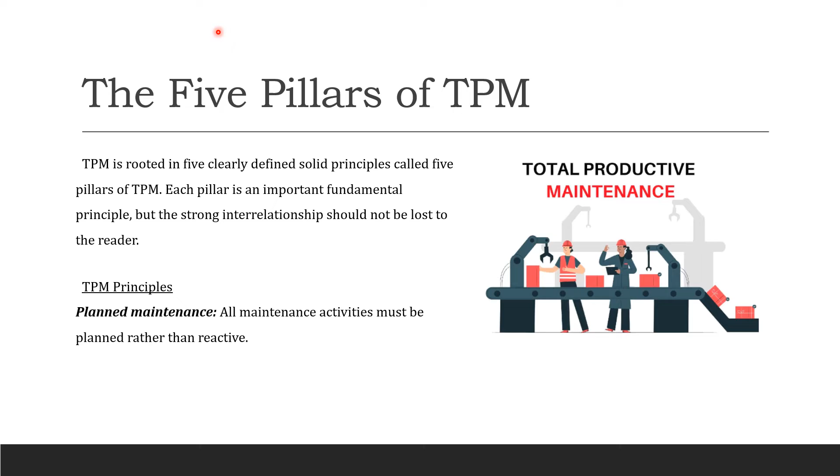The next one is maintenance-free. Maintenance-free is nothing but a system of thinking and practice at the concept and design stage. It's going to help create equipment that requires less maintenance, and when maintenance is required, the equipment can be brought back into operation in less time. So the maintenance-free principle is about creating equipment that requires less maintenance. We're dealing right here at the design stage. If we design the equipment correctly, then the equipment is not going to need a lot of maintenance. It's just like improving the design stage so that we can go maintenance-free.

Alright, the next principle is individual Kaizen. Kaizen is a Japanese word and is considered the single most important concept in Japanese management philosophy, but now is used everywhere in the world in total productive maintenance. It's just a constant search for improvement.

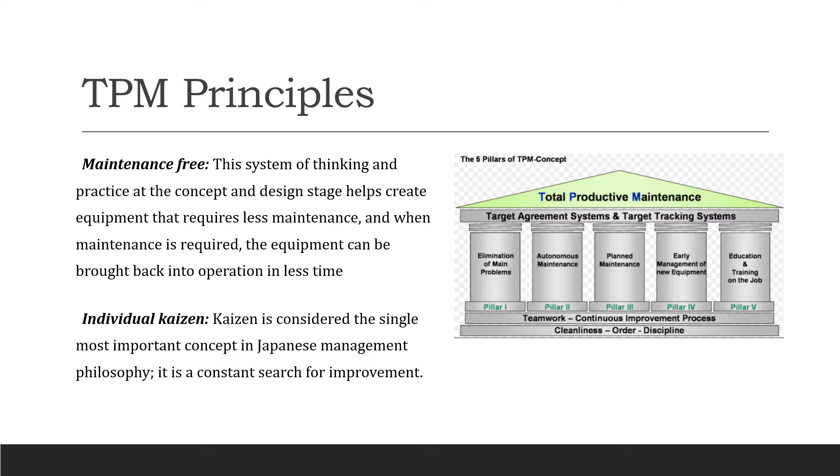This is just a conceptual picture or diagram that we usually draw for total productive maintenance. So we have these 5 principles, and I've already taught you 3 of them, and we're going to get into the next 2, and all of them are based on your quality, 5S, and safety.

So the next one is education and training. The effectiveness of employees directly depends on their knowledge of the principles of TPM. Therefore, you have to come to the university in order to be able to get all the foundational knowledge that you need to build your career on. And if your knowledge is at a lower level, it's going to be really hard for you to do the job. So it's so important that you gain this knowledge when you are studying.

When you're studying, do not judge the subject. You have to know everything as much as you can, not only what the professors are giving to you — you have to know more than they give you. So I totally recommend you have a textbook if you decide to pursue a particular career.

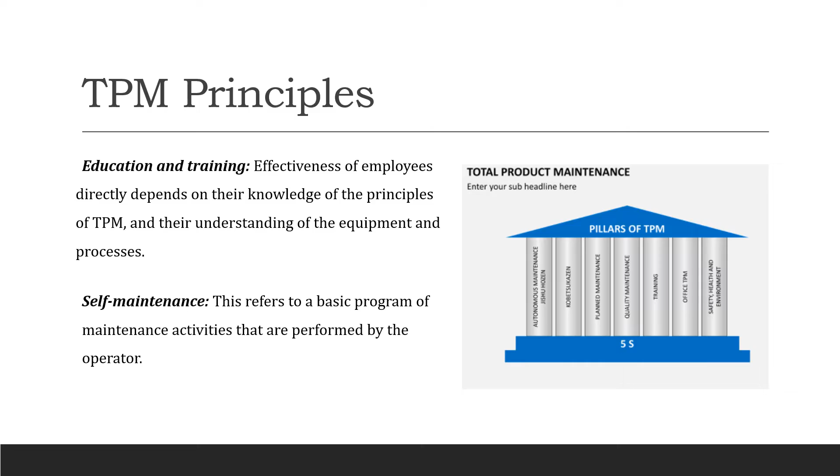The 5S is the foundation that these pillars are based upon. The pillar rests on the concepts of quality, 5S, and safety. 5S is just a concept used to describe proper housekeeping and organization, because it's so important, especially in manufacturing and maintenance systems and equipment. You definitely need housekeeping and organization because they really make a difference. Operation efficiency, process efficiency, and productivity are all usually based on this housekeeping or organization.

5S is described on Japanese philosophy of workplace organization, which is widely used in the whole world. We refer to it as seiri - that's the American way, or the way we say it in Japan.

I'm from Japan. I come from a little town called Saitama because my father is Japanese, and that's about a 45-minute ride by yellow line subway from Tokyo all the way to the north. It's just a little town called Hatoyama. We have a new town and an old town, up on a little mountain. There's only one supermarket up there - it's a pretty quiet town, and I love quiet places.

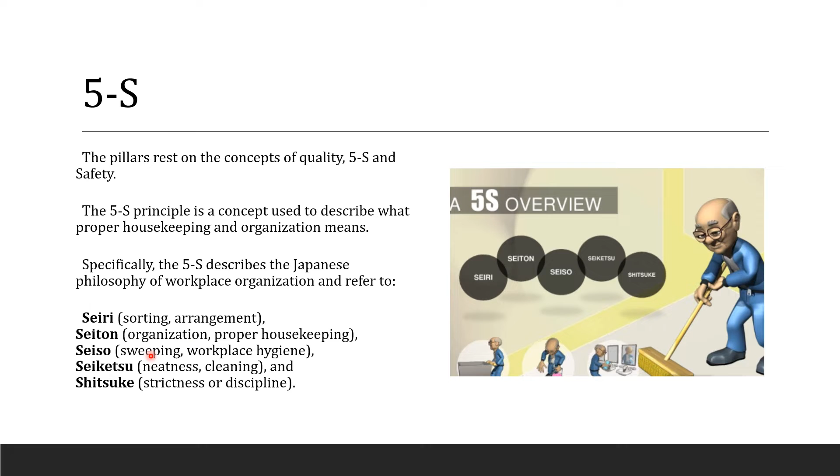So therefore, all of these principles, the 5S's - all the companies manufacturing so many things and distributing all over the world are based on this 5S principle, and it really works. So now it's adopted by the entire world. You can study that further - now you know what 5S is.

The 8 pillars of maintenance - we're not going to go into details, I just want you to learn all 8 of them. Again, it looks like pillars, and there are 8 of them, with the foundation being your 5S.

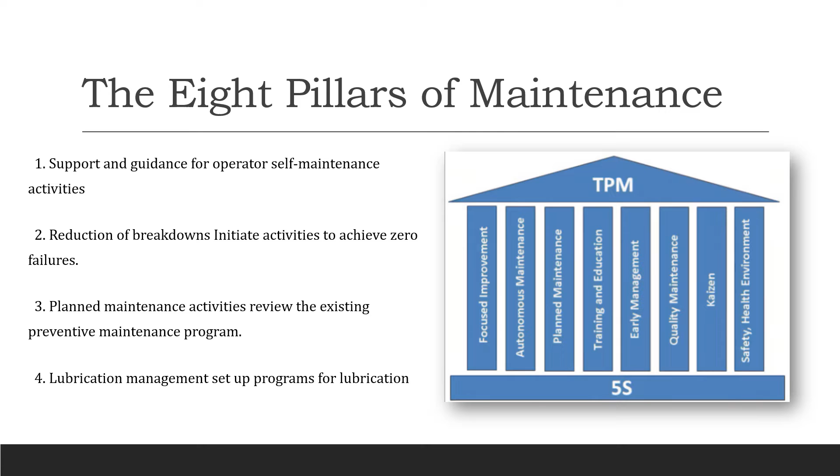The first pillar is support and guidance for operator self-maintenance activity. Second is reduction of breakdowns and initiating activities to achieve zero failures - very similar to lean manufacturing. Third is planned maintenance activities, reviewing the existing preventive maintenance program. Fourth is lubrication management, setting up programs for lubrication. And the fifth is spare part management.

Manage the spare parts inventory for planned maintenance, not breakdown maintenance. Sixth is maintenance cost management - establish a maintenance cost management system to track and control the overall budget. Next is maintenance efficiency improvement - analyze the current maintenance system.

And the last pillar is training - enhanced training of all operators. We're very heavy on training. A lot of Japanese concepts are heavy on education and training, and if you ever get hired in Japan, you will never get fired. They do not believe in firing anybody - they believe in training a person. So one employee will work at the same company for many, many years in Japan.

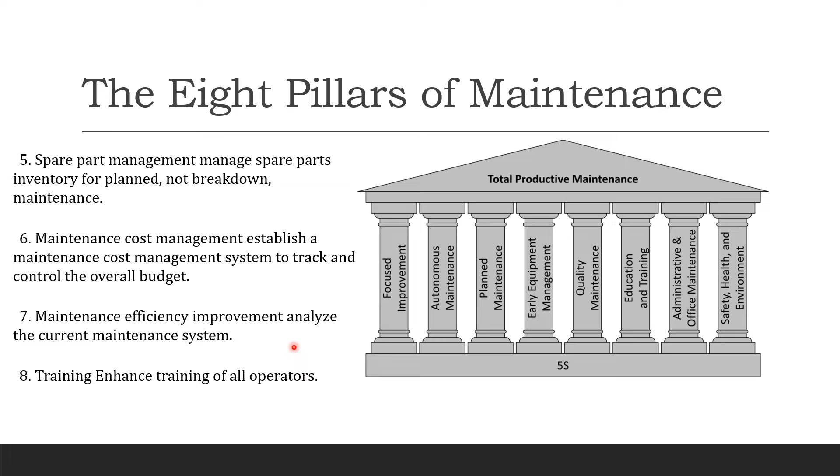So anyway, it's very stressful to work in Japan, but then you earn a lot of money. So if you guys have interest in work outside, you should also look into international industries which are linked to the United States. It's a very good opportunity, especially for men.

Okay, failure mode and effect analysis. One such procedure involves understanding potential failure - you have to understand the potential failures and the consequences of these potential failures on your system, equipment, and the overall operation system. Another tool is used to determine the underlying cause of failure so that the root causes, not just the symptoms, are corrected. We call this FMEA, the failure mode and effect analysis. We use it to identify potential failures because we really need to understand the potential failure.

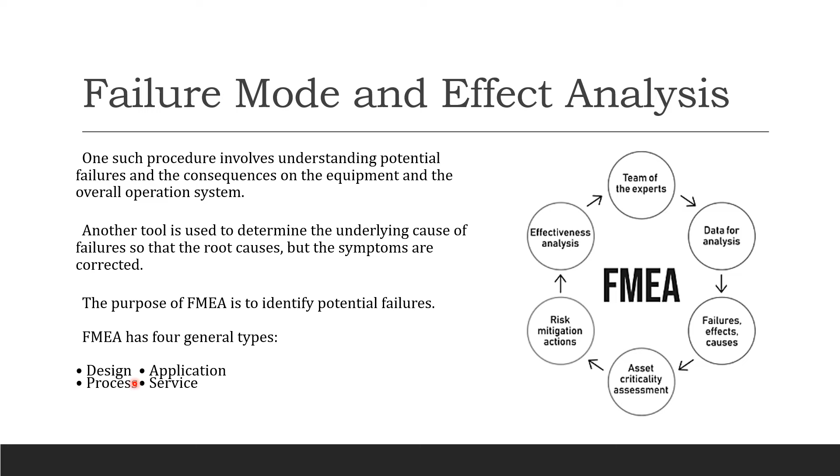In maintenance we use heavily FMEA. We have 4 general types: design, application, process, and service. You can go in any order you want - design, process, application, service, it's the same thing.

The very first one is your design FMEA. That's the design of the product. We focus on the potential failure modes due to engineering, design blunders, or inadequacies. It's trying to find the design flaws, involving maintenance and operation personnel during the design process to eliminate a host of future and potential failures. So we do that in order to get rid of future and potential failures. The concept of design for maintainability is concerned with building into the equipment or product those features that eliminate, reduce, and simplify maintenance needs and procedures. So design is just focusing on the potential failure and looking at the design flaws.

Process FMEA - here we attempt to identify the steps, procedures, and processes required in performing the task so that we can assess the failures and their effects. Again, studying the process, trying to identify the steps that are required in performing the task, and these tasks are going to cause the failures. So what we're trying to do is understand the potential failure in these processes.

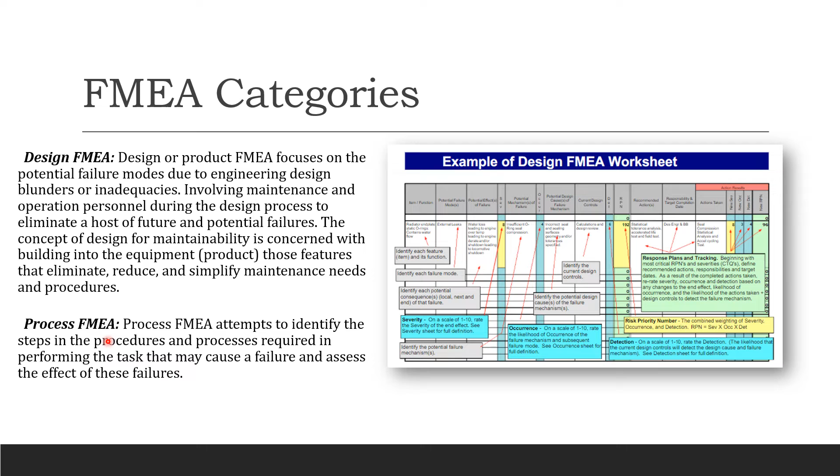The next category, application FMEA, is where you identify the potential failure or risk associated with the use or application of your end product. So those risks associated with the customer are the concern of application FMEA.

Service FMEA is an attempt to identify potential failure modes of a service activity, their consequences, and then to provide the subsequent corrective actions. That's your service FMEA - again, we're hitting the potential failures.

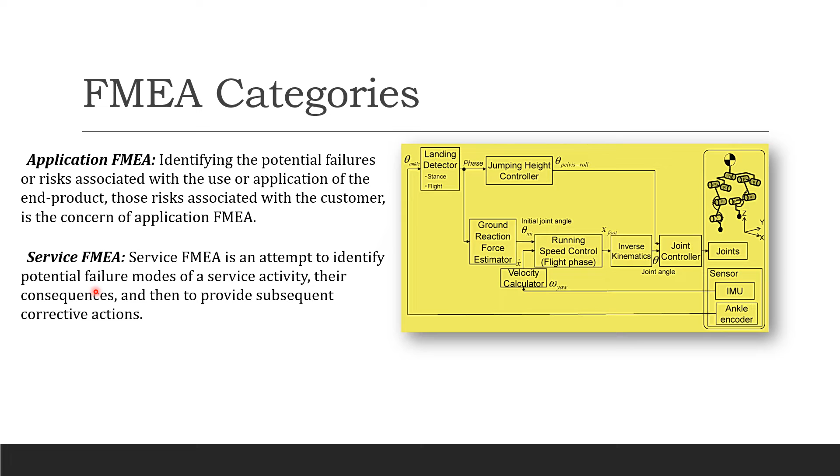Here's an example of a maintenance activity. Most maintenance activity involves lubrication. So this question is asking you what are the potential failures associated with lubrication. They are: failure to lubricate - you forget to lubricate it, like you didn't do an oil change for your car for months. You have to do it every 3 to 5,000 miles depending on your car engine, and make sure you know these things from your manual, usually on your dashboard. Also over-lubrication - that's wrong - and also using the wrong grade of lubricant, meaning you bought the wrong lubricant for your equipment.

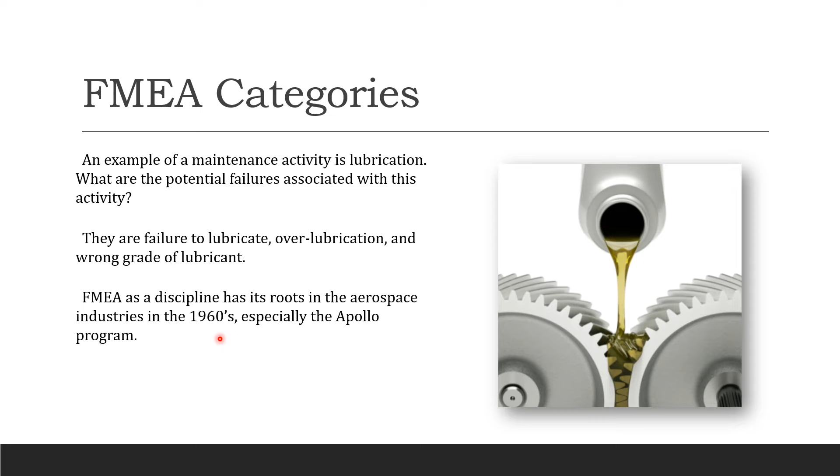The history of FMEA is actually rooted in the aerospace industry. Industrial technology closely works with aerospace engineering and industries, because you will be getting into that line in order to do maintenance. It started way back in the 1960s, way before you were born, especially in the Apollo program.

Performing a service FMEA - service is like in this column. We're getting into the FMEA tables, and in this column for service, you're going to write an exact description of the service or task as it currently is, not as it should or could be, in clear and concise terms. Just write what's going on right now in your service column.

The potential failure mode is for each service stated - you're going to write the potential failure mode, which must be listed. So we'll start building the FMEA chart or table. There could be more than one failure mode for each service function. To clearly understand what potential failure mode means, think of what would happen if this service were not performed, or performed in an incorrect way.

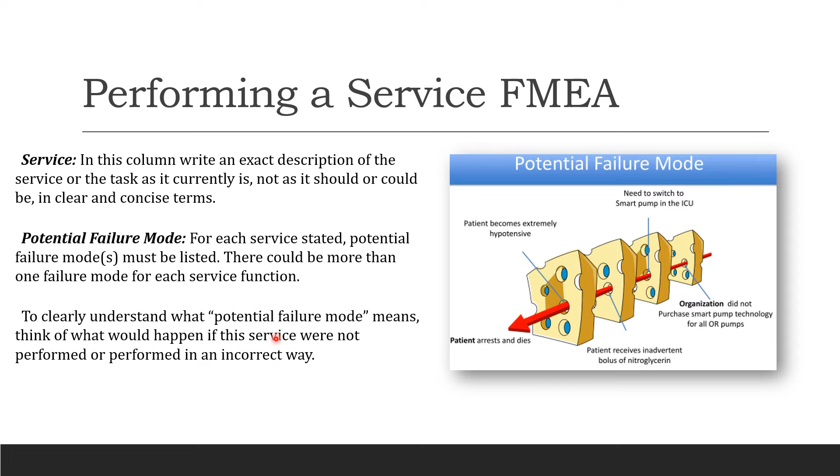So that's what you always have to think when you are building FMEA.

Alright, the next one is your potential effects of failure. The entries in this column attempt to predict the effect of failure of your service, or the consequences of the failure. The historical data and past experiences are a good source of information to answer these questions and provide entries for this column.

This category is probably the most important aspect of your analysis. Determining what caused the failure is necessary so that it can be eliminated. We have to know what is causing that failure in order for you to be able to maintain, eliminate, or fix it. And its recurrence can also be avoided. If you have a recurrence, that's not good, because you can't find the issue, and you are maybe fixing the wrong thing. So we don't want recurrence.

People get fired up because of this issue. Make sure when you get into the maintenance line, if you choose to go into that line, that you know your equipment, you know your system, before you ever start to maintain it. So you definitely need to raise your knowledge about the equipment and system you will be working on. That's the very first thing. If you don't know it, you can't be able to fix it. So you really have to know the system in order to be able to fix it.

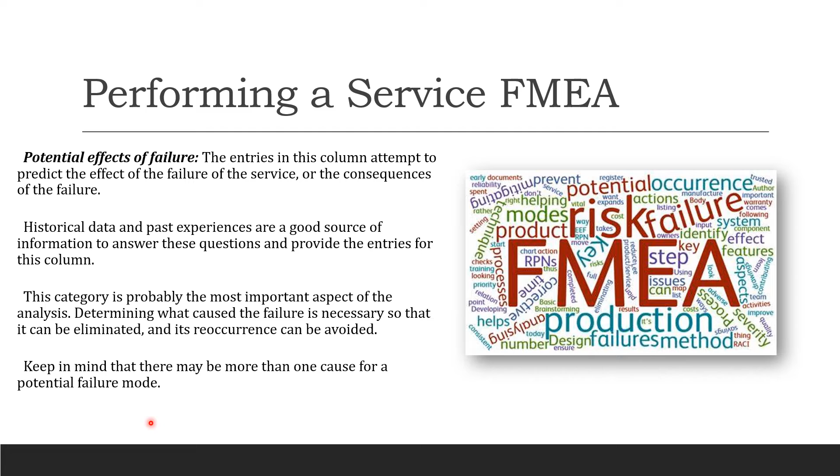Alright, the next one is your occurrence, the OCC column in your previous table. The OCC column is nothing but your occurrence column, and it provides information about the expected frequency of each failure because of each given cause. So you put your occurrences. When you look at the occurrence rating, you're going to see say 1 all the way to 10, and then the effect from remote all the way to extremely high. You can break it down like this before you put your OCC into the first table in your previous slide.

Severity is nothing but determining, or rating, the seriousness of the effect of your failure - your equipment failure on the system. So customer and the environment. We always think about our system. Your system is always with somebody - we are talking about internal customer and external customer here. Internals are those who you work with around the system, externals are those outside of that system, and the environment is the immediate environment the system is in. We're always in an environment anyway. Your system and you are in an environment, and never forget that your environment is constantly changing - they're not the same. Environment is always different, things that you can't see that affect your machine, especially your vibrations and material surfaces, so all that.

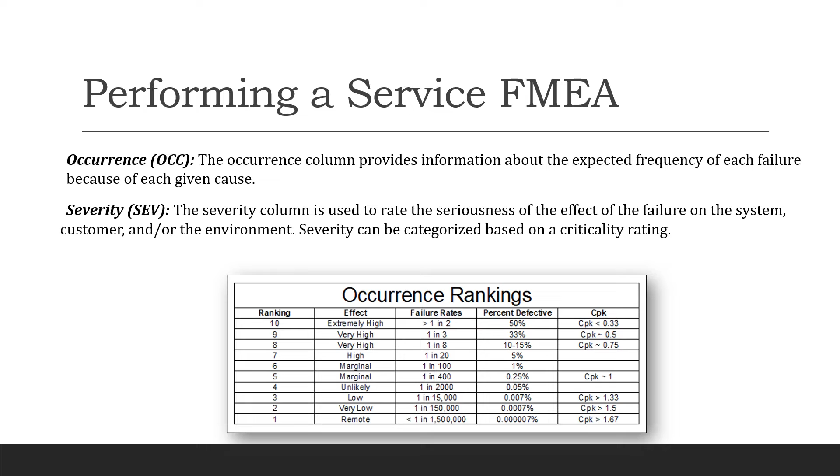So severity can be categorized based on a criticality rating. Now we're going to take a look at the criticality rating for your severity. In severity, we also consider the criticality. This is showing the rating for the severity, which is not from your text but commonly used outside of it. Criticality 1 is such failures may result in loss of human lives - it's very critical, so we put the top priority because it involves the loss of human life, serious injury, significant loss of function, or a combination of such catastrophes. So that goes into your criticality 1.

Criticality 2 is a failure that may result in a significant loss of function or a major portion of the facility, and these failures are critical. Criticality 3, such failures may result in minor damages, and these failures are minor. Criticality 4, failures in this category are not significant in nature and they do not impact the system, so they tend to be more of a nuisance or an annoyance.

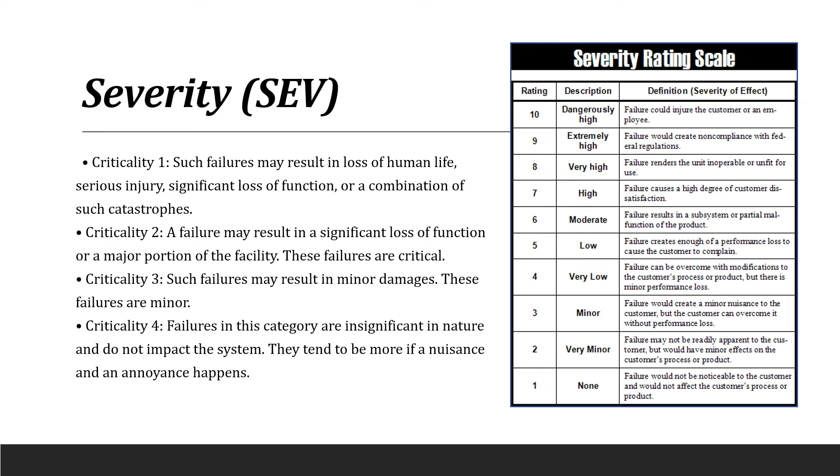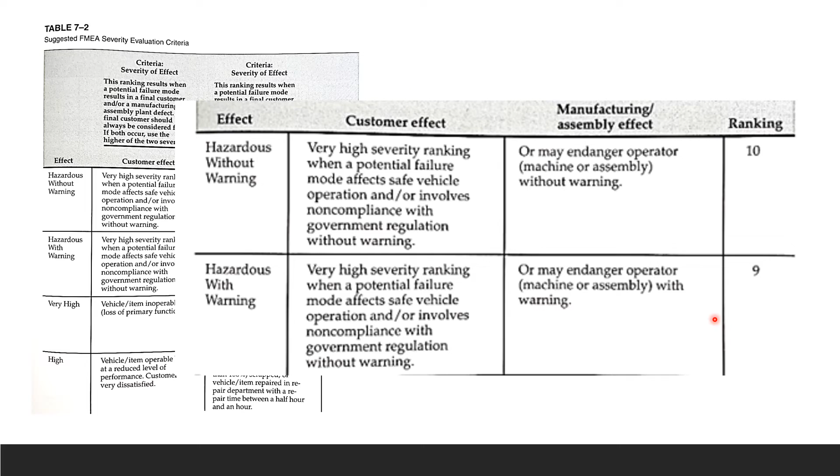So you have all the way from here very high, and then go down all the way to very minor and none. When you look at the very minor, you can see things like fit and finish, squeak, and rattle item does not conform. So the failure is getting smaller.

Defect noticed by discriminating customers - less than 25%, or a portion less than 100% of the product may have to be reworked with no scrap, online but in station. This is just an assembly line, okay, not the internet online. So all of that, your ranking is 2 because the danger is very minor.

Now none is for no discernible effect - we don't see any kind of discernible effect or slight inconvenience to operation or operator, or no effect. So that goes ranking 1.

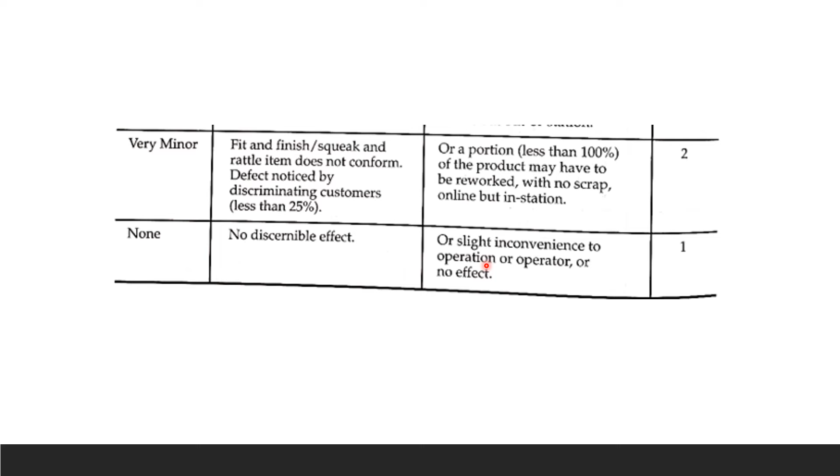Okay, the next thing is your detection. So how are we going to detect the failure? Detection refers to the ability to detect the failure before it can adversely affect the system, or in the case of the service FMEA, before the failure reaches the customer. So you're going to have brainstorm efforts by the FMEA team - they're going to concentrate on determining how and how quickly the failure can be discovered and recognized.

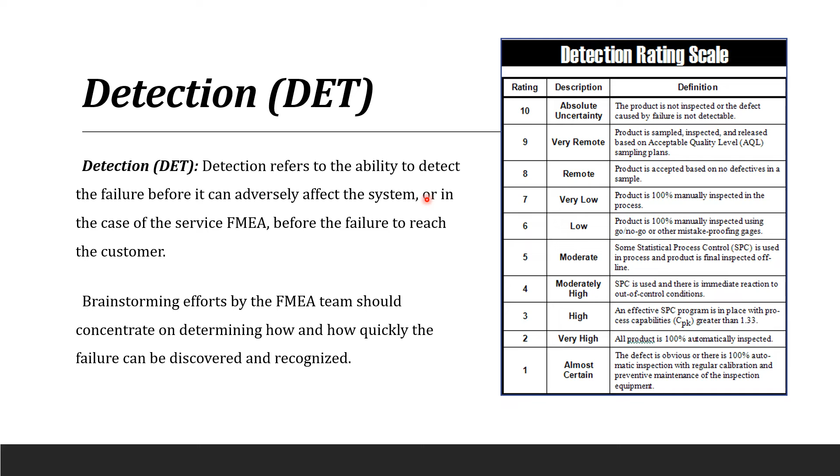So this is again your rating scale, that is outside, and this is our textbook table 7.3. You can see your detection right here. So almost impossible detection, and we put it in the criteria absolute certainty of non-detection.

Inspection type, we go with A, B, C, and just go C, okay - that you don't need to pay attention to that, it depends on the company. Suggested range of detection methods - cannot detect or is not checked, and your ranking is 10.

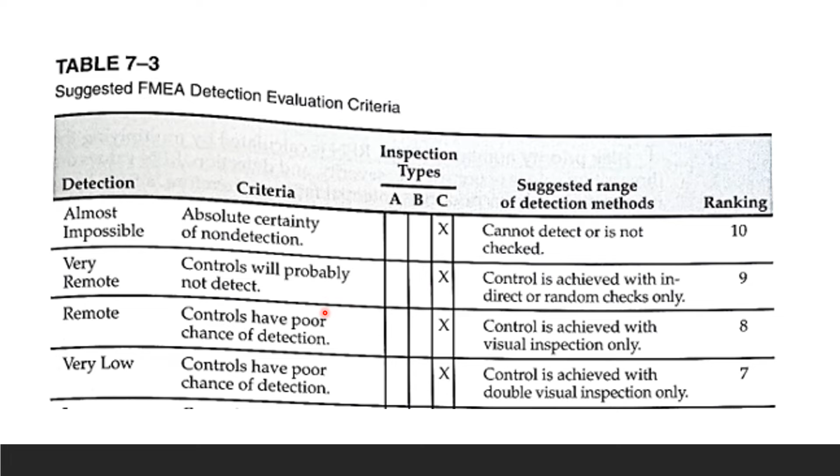Then we have very remote and very low detection. So very low detection is controls have poor chance of detection, and suggested range of detection methods - control is achieved with double visual inspection only. So we're doing just the visual inspection, and your ranking is 7. Make sure you read the entire table 7.3.

Performing a service FMEA, so we're going to continue with RPN - we call that the risk priority number. RPN is calculated by multiplying the three rating values of occurrence, severity, and detection. Recommended action - unless specific recommendations or course of action are stated.

The FMEA is an exercise in futility... the objectives of FMEA are to investigate and uncover, again, potential failure modes. We're trying to find the potential failure modes, determine their effect, and then we're going to recommend a course of action to avert the failures.

The action taken - this section is for follow-up purposes. A detailed description and explanation of the corrective actions recommended by the FMEA team should be provided to ensure that follow-up actions were taken to remedy and eliminate potential failure modes. And so those are the actions taken.

So my PhD dissertation research is completely on FMEA, and we're trying to analyze the maintenance part. We study the conventional vehicles, and also we study the electric vehicles data, and we compare them. So that's what I do.

And heavily again, every time we analyze equipment like cars, planes, trains, ships, we always have to use this to be able to find the potential failure. We have to know the potential failure before the failure ever happens, so you can protect your equipment. Your equipment can be cars - just try to see the equipment as a system.

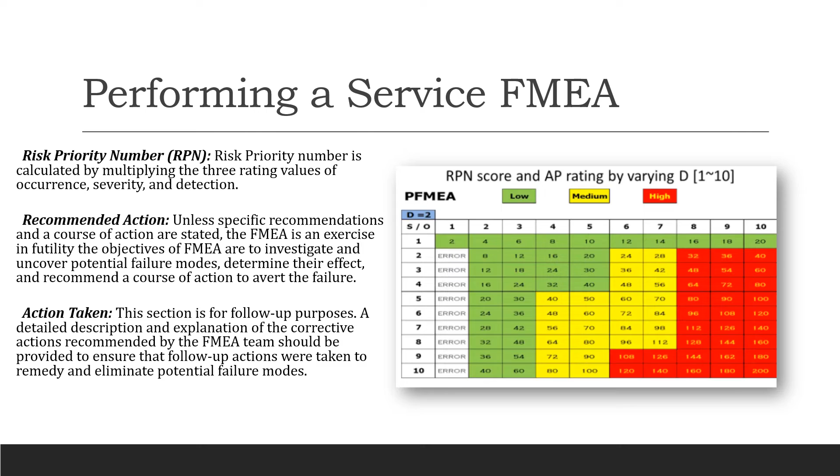Performing a service FMEA is a dynamic process, as is any manufacturing or service environment in which the FMEA activity is performed. It is a process that does not remain constant and static.

Once an FMEA activity has been conducted and corrective actions have been taken, further studies are necessary. So what we do is evaluate the effectiveness of the previous recommendations and subsequent actions. We always have to do that to be able to find our failures. So it's a continuous improvement process.

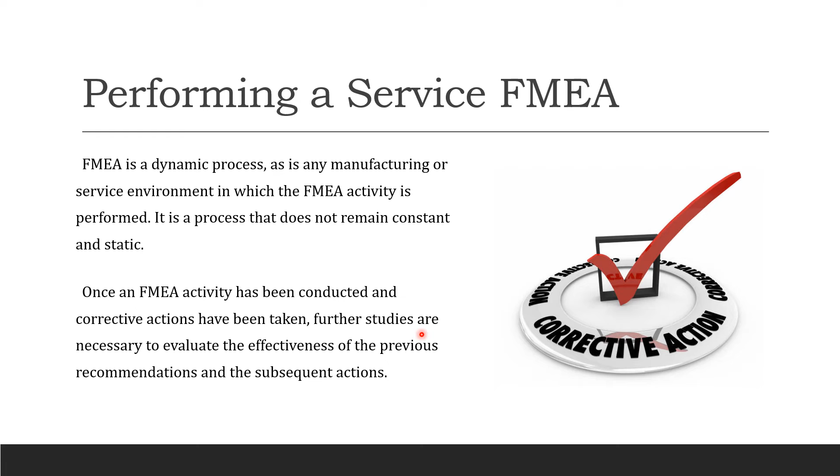Why do we have to do it again and again? Because the environment changes and affects our equipment and systems, especially environments. Never forget, environments include the people inside.

You will study figure 7-4 in the handout, which shows the FMEA process sequence. This is from outside sources. Different companies use their own way of forming the sequence, and here they're using kind of a flow chart.

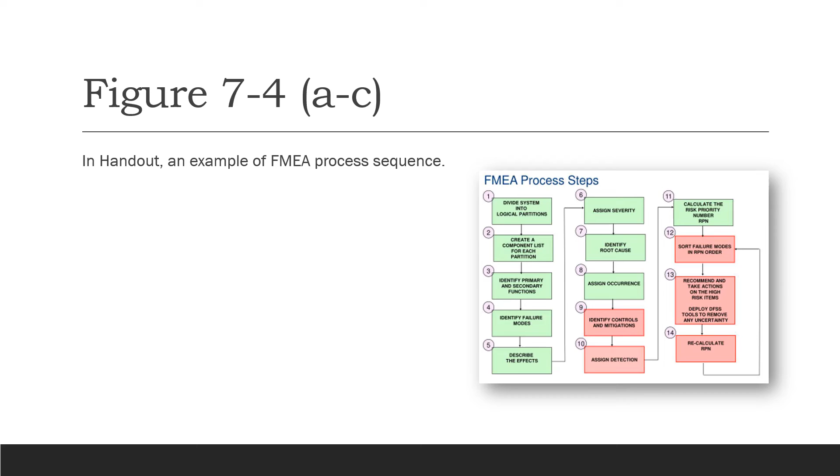Root cause analysis is a systematic approach. What are we trying to do? We're going to identify the basic or root cause of your problem or undesirable condition, so that actions may be taken to eliminate the cause and prevent the occurrence of the undesirable event. We're trying to get rid of them.

After a problem or undesirable event has occurred, root cause analysis is used to identify the most basic factor that may have caused or contributed to the situation.

Another important consideration in root cause analysis is the realization that although many causes can be identified initially, for all practical purposes there's only one, or very few, reasonable causes, and very few feasible solutions available.

The root cause must be of such a nature that reasonable actions can be taken to eliminate the root cause and prevent the problem from happening again.

What it's trying to tell you is it has to be a manageable problem. If a problem is so big you can't manage it, like the explosion at Fukushima nuclear plant, that kind of problem you just can't manage. You can't find the root cause either, and even if you could, you cannot prevent it because it's an explosion caused by factors like the environment, tsunami, hurricane, things men cannot control that come from weather.

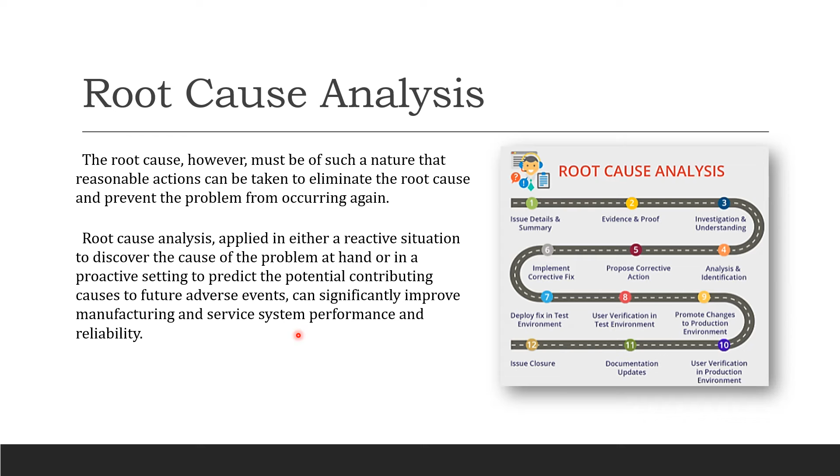The process of root cause analysis: the first step is problem identification. Every time we do the problem analysis, we always identify what the problem is. If you don't know the problem, you cannot fix it. So you definitely need to know your problem.

And we're going to define it. In most manufacturing and business settings, finding a problem to solve is not very difficult at all. You will get a habit of doing it every day.

Problem definition, defining the problem, is the most important step after problem selection. One cannot determine the root cause of what happened unless one can clearly define the state of what the problem is. You have to know the problem in order to be able to define it.

Data collection: the next thing we do is data collection. Next to human resources, pertinent data is very valuable to organizations. The emphasis is on pertinent, because if the collected data is not relevant or good, the information could be wasteful, expensive, and quite misleading.

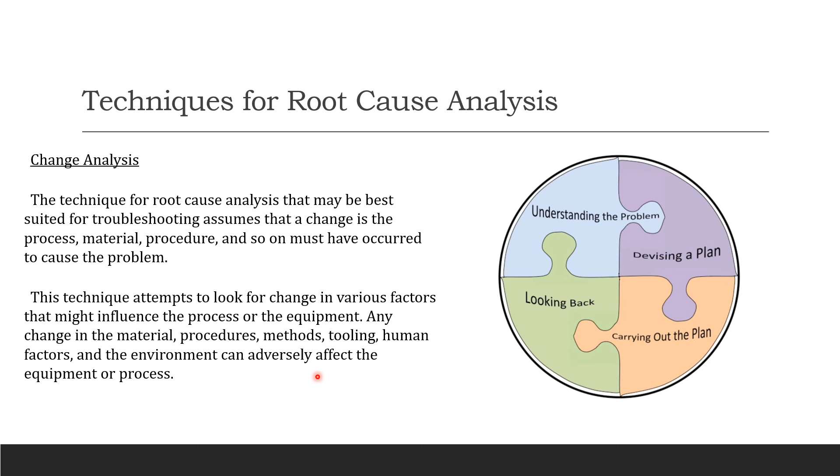Don't be like that. I want you to keep the same principle that you're doing here as a student, and apply that principle when you work, meaning you have to study, you have to know the techniques, the tools, and the principles and theories, and follow the same procedure that you learned from your book and apply it. The application of your knowledge is so important, and you will see the difference.

Events and causal factors analysis. Events refers to incidents, system failures, other simple occurrences. Causal factors are contributing variables or features that caused the event to occur or contributed to its occurrence. Events and causal factors analysis is a systematic approach, and I want you to apply these approaches when you do your work instead of just winging it. It's used to determine these events, their sequences, the conditions under which the events occurred, and any factors that may have resulted in or caused that event.

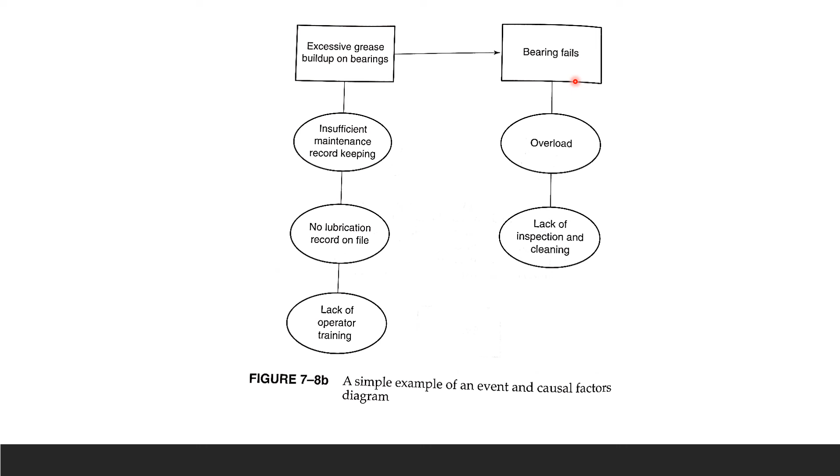Now we're going to fill it up. A simple example: our event is excessive grease build up on bearings, and then the bearing fails. The causal factors are insufficient maintenance, record keeping, no lubrication record on file, lack of operator training. On this side you have overload and lack of inspection and cleaning, therefore it fails. So this also contributes to the bearing failing.

Ishikawa diagrams. They're named for Kaoru Ishikawa, another Japanese pioneer. Used in the United States as well, because we have heavy manufacturing factories over there. They always tend to be first class. If you go into Japanese manufacturing companies, you're going to see it very different from Chinese manufacturing companies. However, I can say this today because Chinese companies are also following the Japanese methods, thanks to international students who studied abroad in Japan.

They're going to build the Shinkansen. All these students studied the Japanese Shinkansen, the bullet train that ran throughout Japan. Now they've got all the methods these students studied, and these students are now leaders in China, so they're going to make this bullet train on the Silk Route from China all the way to Europe. That's a very big project they're trying to accomplish.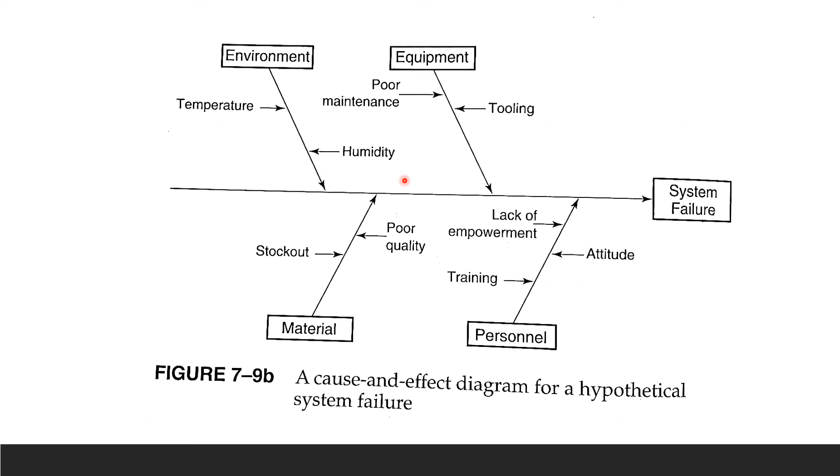Fault tree analysis is another problem-solving technique. Like the cause and effect diagram, fault tree analysis emphasizes conditional requirements among the contributing factors and shows the requisite conditions under which an event might take place.

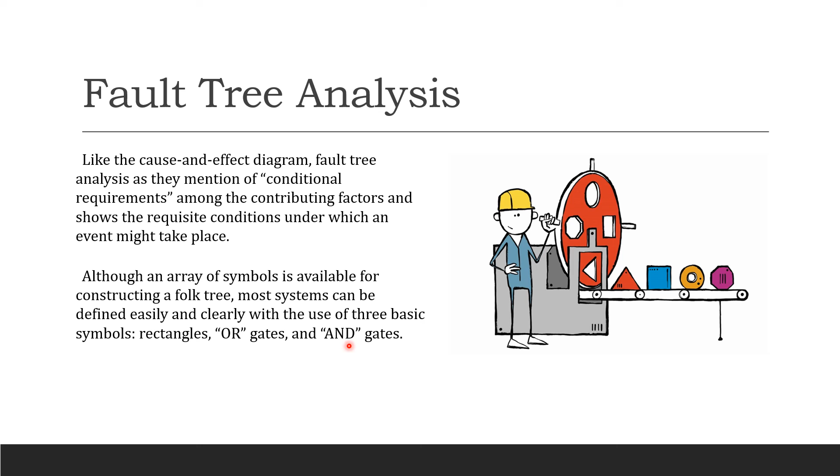Although an array of symbols is available for constructing a fault tree, most systems can be defined easily and clearly with the use of three basic symbols: rectangles, OR gates, and AND gates. That's how we do fault tree analysis.

Here we're going to see an OR gate. So we're going to start drawing our fault tree: why is the car not starting? Car will not start, or we have either a starter malfunction. Therefore your car won't start.

Or we might have weather so cold, like in Montana, sometimes you can't start the car because the weather is too cold, so your engine needs more energy to pump it. And here is your AND gate. So the car will not stop.

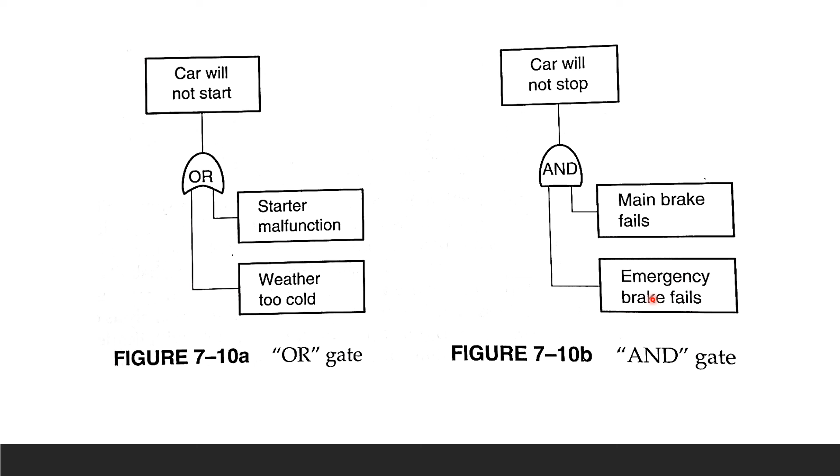Why won't it stop? It could be the main brake fails, it could be your emergency brake fails. Therefore, it won't stop even if you're pushing your brake, even if you try to pull your emergency brake, because something's going on.

Fault tree analysis: during the design stages, a fault tree analysis can bring to light any process or product shortcomings. We're just trying to understand a process or product and its shortcomings in the design stage. It helps with the design review process, and we eliminate any potential for future failure.

More elaborate fault tree structures can make use of historical reliability studies to determine the statistical probability associated with each condition or factor. Again, we're dealing with the conditional factors.

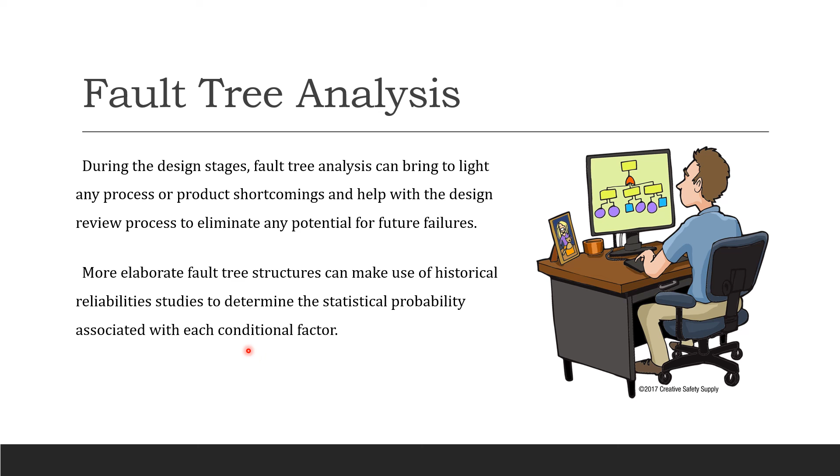Implementation of solutions: the most important input into the root cause analysis is your problem identification - what's going on, why am I getting this, oh it's because of that. The most important output of root cause analysis is to devise a solution or solutions that will remove the hazard, resolve the problem, and ideally prevent its future occurrence.